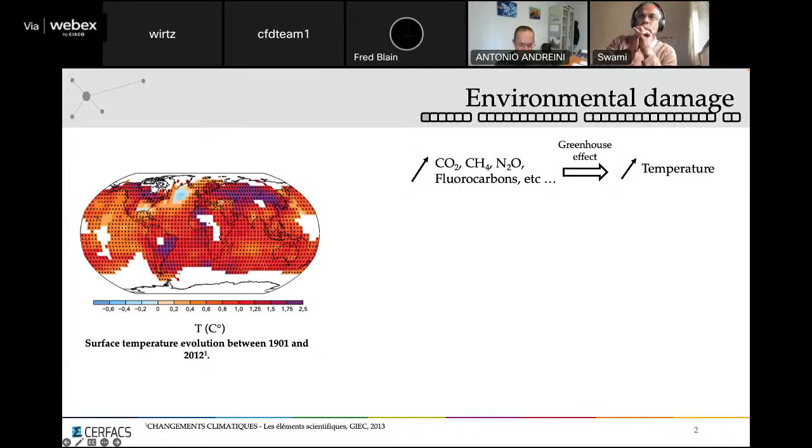First one on the environment, for example the seas are rising because the ice is melting, and there are longer heat waves. This also has consequences on human beings, that is to say populations are moving more, there are more water and food crises, and diseases are about to multiply.

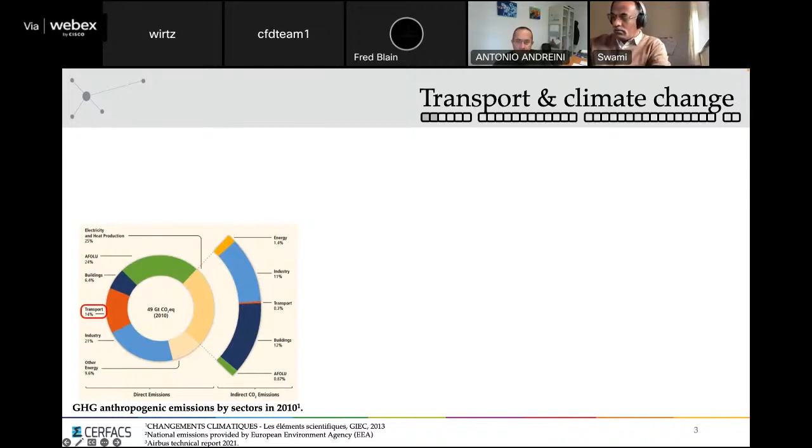Concerning the transportation sector, here is a graph concerning the anthropogenic emissions by sector. For the transportation sector, it's about 14%, mainly due to the combustion reaction with air of a hydrocarbon, giving carbon dioxide and water, which are greenhouse gases.

Among this transportation sector, we have civil aviation accounting for 13% of the total CO2 equivalent emissions, which represents 1.8% of the CO2 released.

But we also have to take into account other effects due to other pollutants, such as nitrogen oxides, carbon monoxides, soot, sulfur oxides, or unburned hydrocarbons, which account for a total of 3.5% of the total radiative forcing on the Earth.

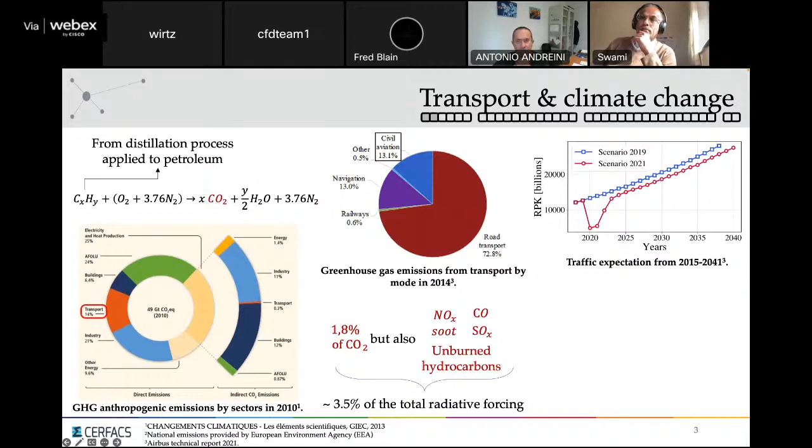This has to be put face to face with the traffic expectation that is expected to rise in coming years, as you can see on this graph representing the number of passengers for the years to come. Therefore, there is a need for improving our airplanes.

This is made by improving our power sources, which then must remain possible, safe, and sustainable, that is to say, to release less pollutant than fossil fuels.

We have three main strategies at our disposal. First would be the use of batteries. But as you can see on the graph on the left, representing volumetric energy density as a function of gravimetric energy density, batteries have one order of magnitude below the liquid fuels commonly used in aeronautical gas turbines, meaning we would have to carry 10 times the weight, which would not be suitable for aeronautical aviation.

Second, we could think about hydrogen, but the technology is not ready at the moment to put hydrogen in a current aeronautical gas turbine.

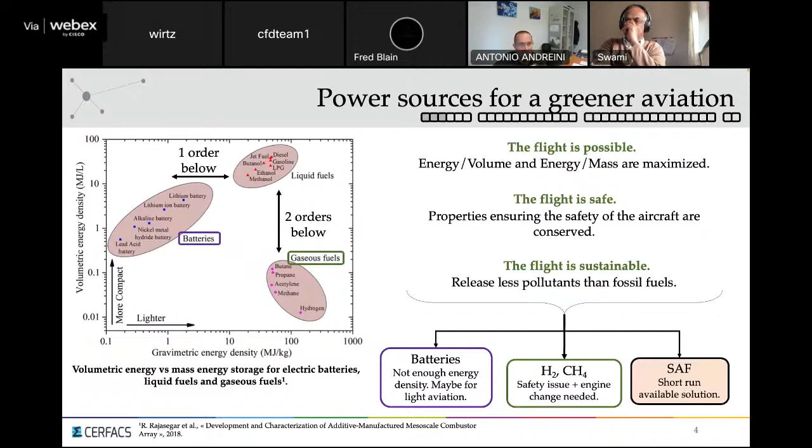Therefore, we will go to sustainable aviation fuel, or SAF, which is a short-run available solution that we could use at the moment. To define what is a sustainable aviation fuel, one must first define what is conventional kerosene.

Here you have the average formula, which is about 10 carbon and 20 hydrogen, but it's mainly made of different types of families, such as 60% of alkanes or branched alkanes, 20% of cyclic species, and 20% of aromatics.

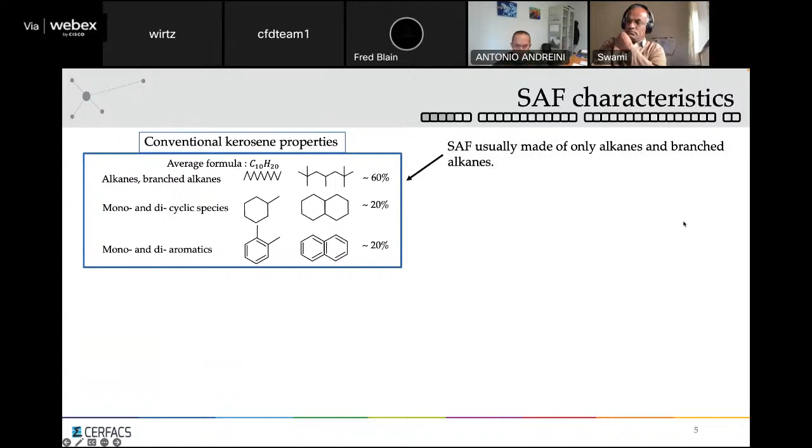Sustainable aviation fuels are usually made of alkanes and branched alkanes, so they will burn mostly the same way. But the idea here is that the feedstock grown to produce those sustainable aviation fuels has already taken part of the carbon dioxide, and then in the total life cycle, it will reduce the emissions that have been made.

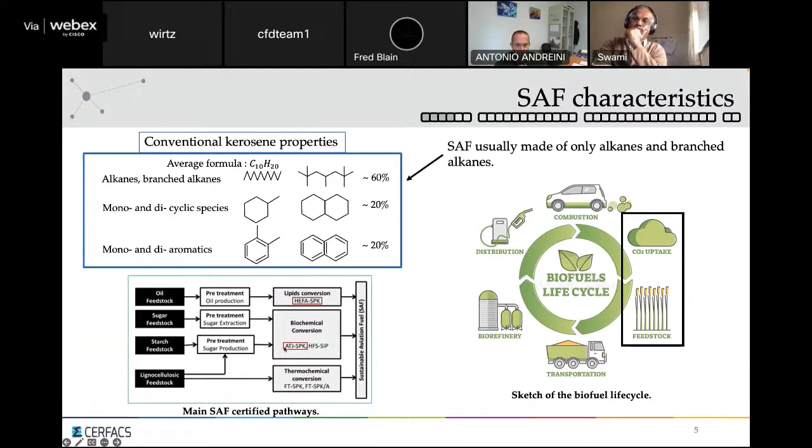There are several paths taken into account, and the most well-known are the one producing HEFA fuel from oil feedstock, and alcohol to jet fuel from sugar and starch feedstock.

This brings me to talk about the Jetscreen project that funded this thesis, whose goal was to create a fuel database based on a fuel matrix with given interesting properties, with experimental and numerical work from the industrial partners and laboratories that took part in this project, to study pollutant emissions, extinction, ignition, pumping systems, and every other system that could be thought of.

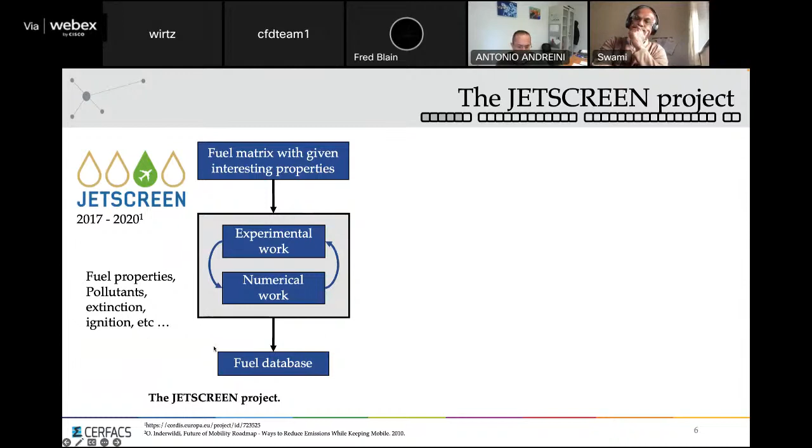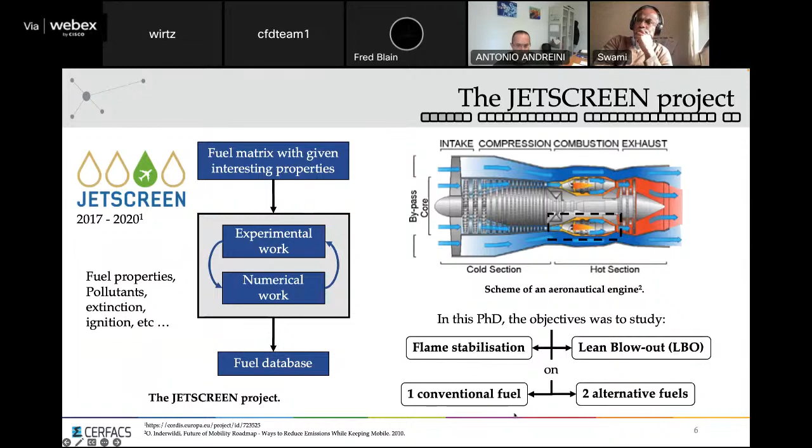If we come back to the combustion chamber, here is a sketch of it. We have primary air that is mixed with fuel through an atomizer, often pressure swirled, allowing for two different zones to be accounted for when the flame is stabilized: the outer recirculation zone and the inner recirculation zone over here.

Then droplets are injected into the combustion chamber in liquid form, and they evaporate before, in between, or after the flame front, giving high temperature. We then lose heat through the walls, the gases are cooled down by the air, and then released through this exhaust duct as burned gases.

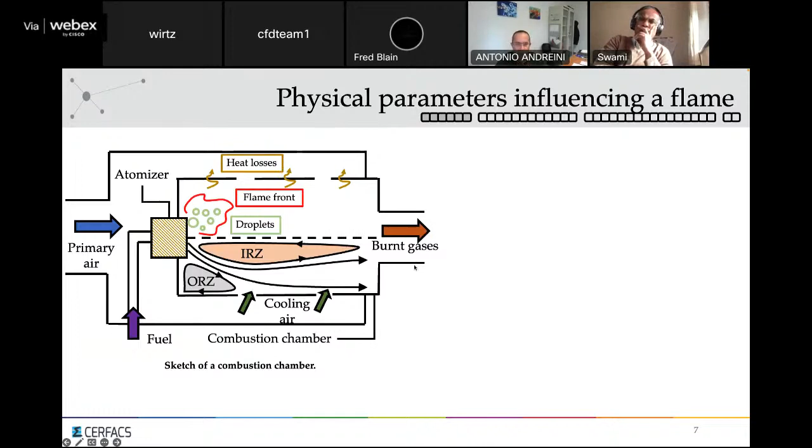This means we have several phenomena that we must account for: turbulence, for example, induced by the high motions of the combustion chamber; the spray, which is both a liquid and gaseous system; and the combustion, which relies on chemistry. For this we need to use large eddy simulation to account for all of that with a compressible multi-species code such as AVBP.

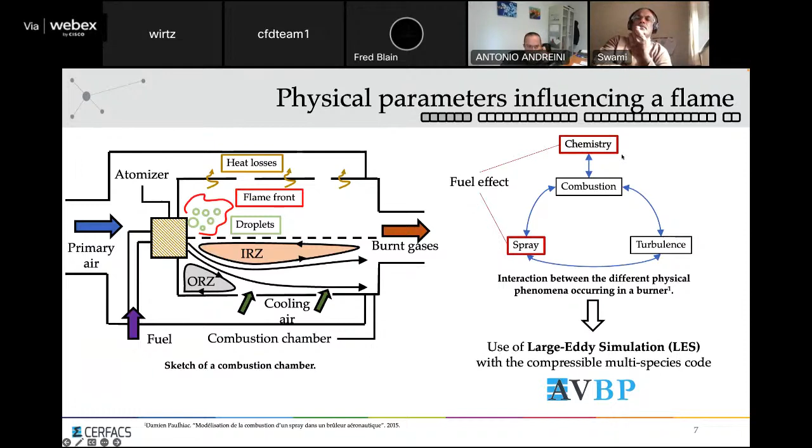This PhD's goal is to look at the fuel effect. Therefore, we will have to look at two main aspects of these sustainable aviation fuels: the chemistry and the spray. This brings us to the plan of the PhD.

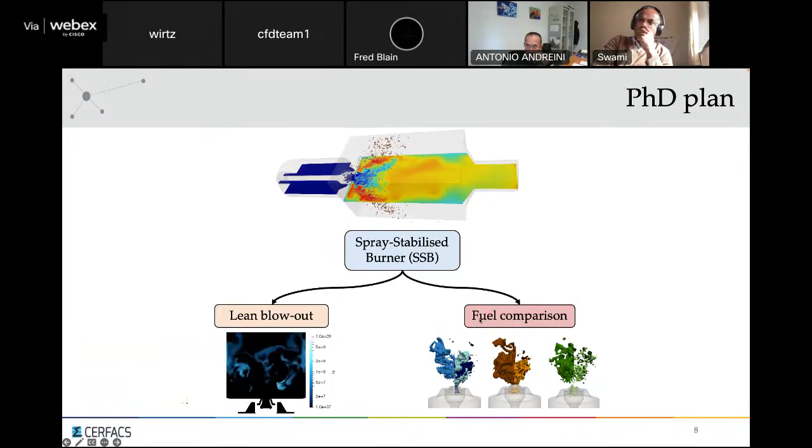First, after introducing the spray stabilized burner from DLR that was experimentally and numerically simulated, we will talk about the lean blowout. Then we will talk about fuel comparison between the one conventional fuel and the two alternative fuels. But first, we have to look at canonical processes concerning the chemistry and the two-phase flow.

So first, we are going to see the chemical canonical processes and go from the experiments to how we should model kinetics in our engine. And that's the data that we received from the experimentalists.

So it's a GCxGC matrix, and the idea is that it's a mass percentage of every species class per carbon number. Each bar here represents one species, and we can't afford to take all of these species in a multi-species code such as AVBP.

So therefore, we have to construct a multi-component surrogate model, and that's what Polimi did with this real fuel. They do that to emulate the properties of this real fuel.

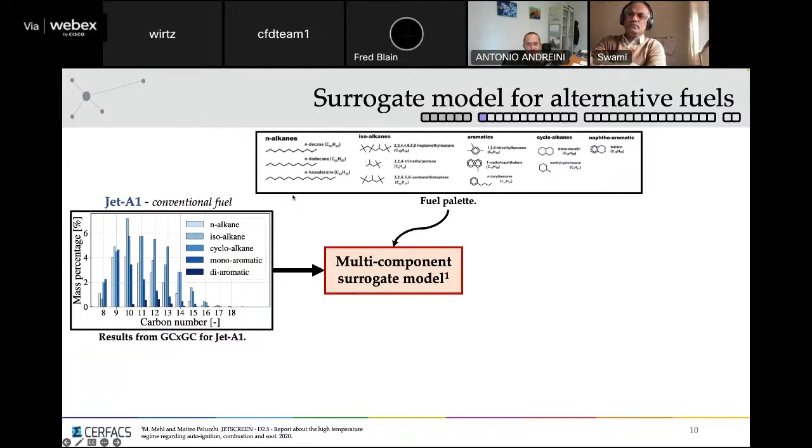So how do they do that? First, they pre-select a fuel palette with several species where they know the properties that they want them to emulate the real fuel. And they choose objective functions: chemical objective functions such as the H/C ratio and the composition, and physical properties such as the distillation curve, viscosity, or density, for example.

Then they arrive at a final surrogate definition, which here for Jet A1 considers n-dodecane at 60%, methylcyclohexane, which is a cyclic species, at 20%, and xylene, which is an aromatic species, at about 20%. Jet A1 in this defense will be used as a reference fuel and will always be displayed in blue in the following slides.

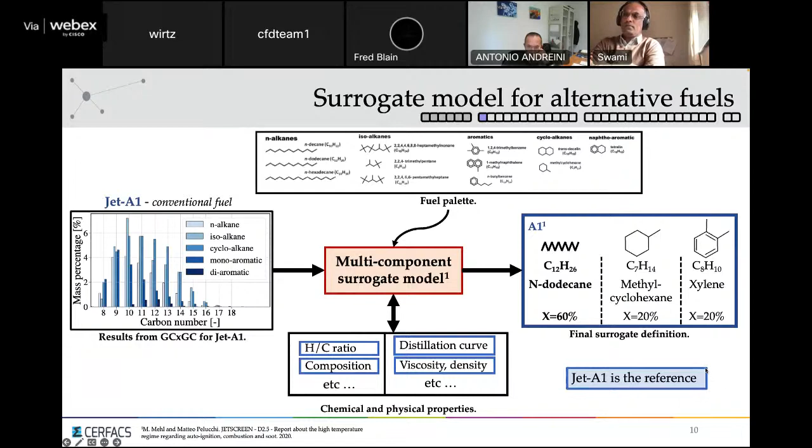For the two other alternative fuels that we are going to see, the first one is alcohol to jet fuel, which is composed of branched species, mainly isododecane, but also a little bit of isooctane and isocetane, and which will be displayed in red.

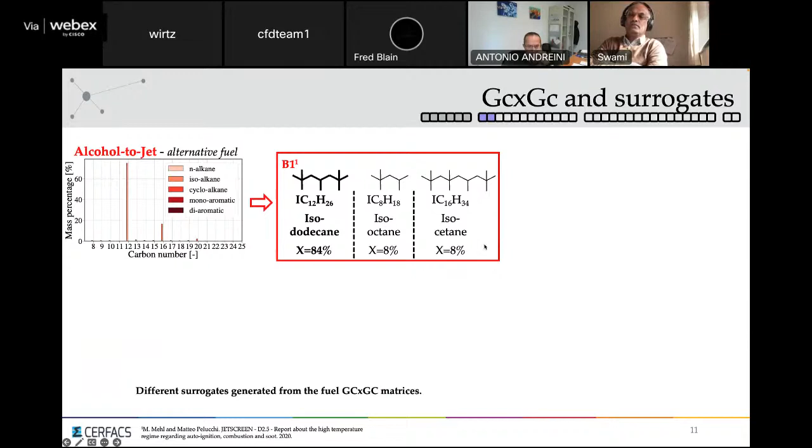Finally, there is a high aromatic fuel that was created for JETSCREEN to look at the influence of a lot of cyclic and aromatic species on a surrogate mechanism, and which is composed of a double cycle species, decalin, at about 60%, a branched species isododecane at about 20%, and a double aromatic methylnaphthalene at about 20%. It will always be displayed in green.

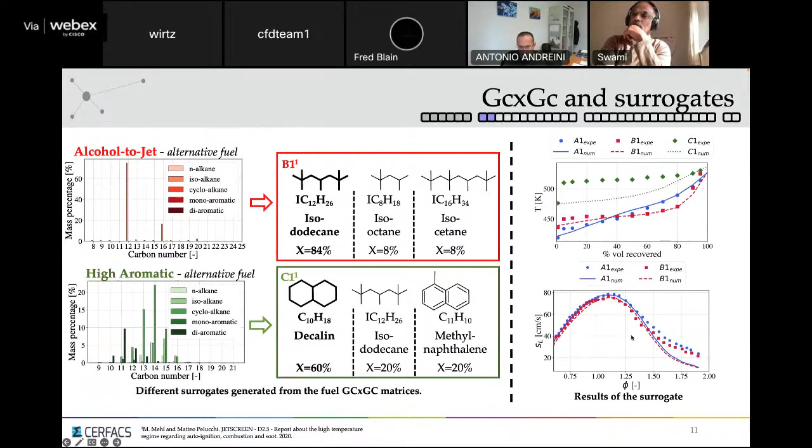If we look at the properties of those surrogates and how they compare to the real fuel, one can look at the distillation curve here and the laminar flame speed over here. There, one can see that between the blue and the red curve there is a good match, and the sensitivity is retrieved for both properties. However, for the green one, it's much further off for the distillation curve, and there were no data at the moment for the laminar flame speed. A second aspect to be taken into account is the reduction of the model.

This often goes through the fact that we receive a detailed kinetic mechanism from the experimentalists that simulates how reactants go to products with a lot of intermediate species. Usually these mechanisms for heavy fuels are above 100 species, which is not affordable for us again.

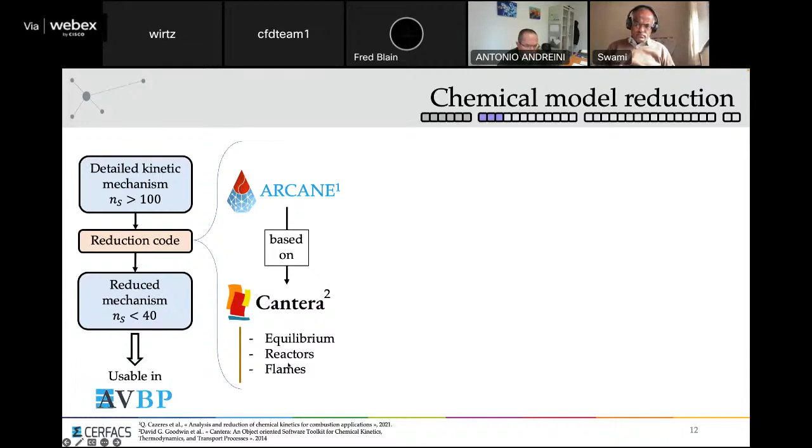So we have to use what is called a reduction code to be able to use a mechanism that contains less than 40 species and that are then usable in AVBP. Here at Cerfacs, we are using Arcane, which is an upper layer from Cantera, an open source kinetic solver that relies on equilibrium, time evolving reactors, and flames.

So how is Arcane working? Here we input to the code a mechanism, fuel, and operating conditions, as well as a target species and maximum acceptable errors that rely on the cases described here.

We will apply three techniques. First is species removal with a direct relation graph with error propagation, meaning representing the species and reactions and deleting the weakest species and reactions that don't contribute to the greatest path.

Second, we are going to lump the species, so if there are isomers, they can be lumped. After applying those two steps, we have a skeletal mechanism, but it is still too stiff temporally and still contains too many species to be used as such in AVBP.

Therefore, we apply a third technique, a quasi-steady state assumption, which relies on the fact that species react very fast, so we can approximate the source term such that an algebraic relation may be found to calculate the species. This means it's still contained in the mechanism, but not in the transported species, which reduces the number of species used in the scheme in AVBP.

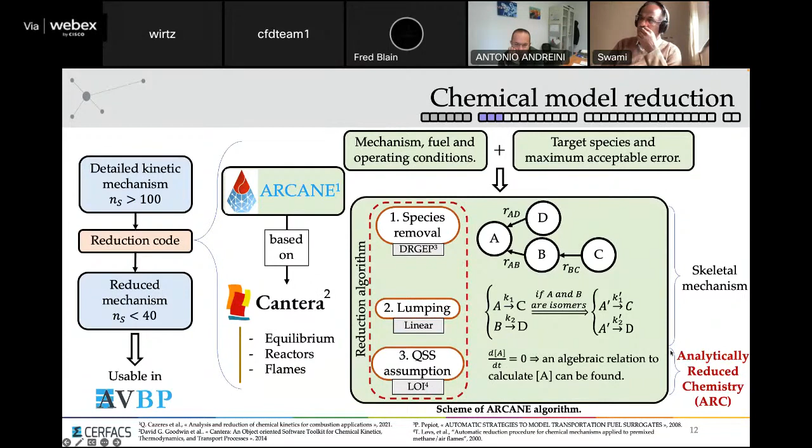This final scheme is called an analytically reduced chemistry, or ARC mechanism. So we are going to do that with the POLIMI mechanism, which contains 368 species and roughly 14,000 reactions.

We applied our reduction step to these cases: a time-evolving reactor with an ambient pressure, a stoichiometric equivalence ratio, and an auto-ignition time. We want the auto-ignition time to be below 15%.

For the premixed flame, we chose an initial temperature of 400 Kelvin, an ambient pressure, lean stoichiometric and rich equivalence ratios, and we want the laminar flame speed as well as the carbon monoxide final and maximum mass fraction to be below 7%, the final products to be below 2%, and the final temperature to be below 1%.

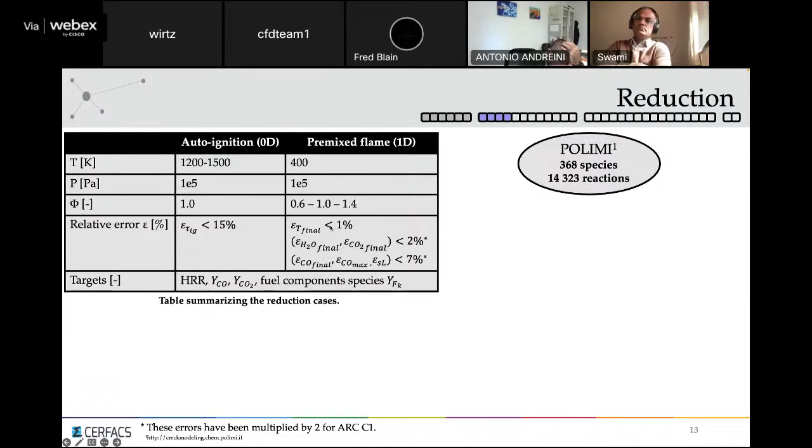We have to say that for C1, the errors have been multiplied by 2 to be able to reach this target error. So what we can look for then is what species are finally kept.

Here we have done this exercise for A1, where we have the fuel species dodecane, methyl cyclohexane, and xylene, the air, the main products CO, CO2, and water, other intermediate species, but most of the species in the mechanism are the decomposition species here.

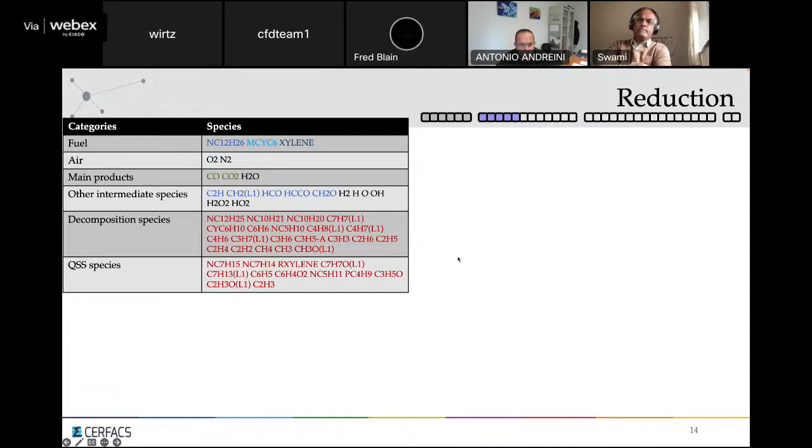If we represent the fuel pathway following the C atom, one can see several paths from the red species toward CO and CO2 and other species, and there are common pathways here for methyl cyclohexane and dodecane, for example.

The most important species are completely comprised in the dodecane mechanism, while for xylene it's much more reduced because it starts from a molecule with a different structure, meaning the more different the species, the more pyrolysis species there will be in the mechanism.

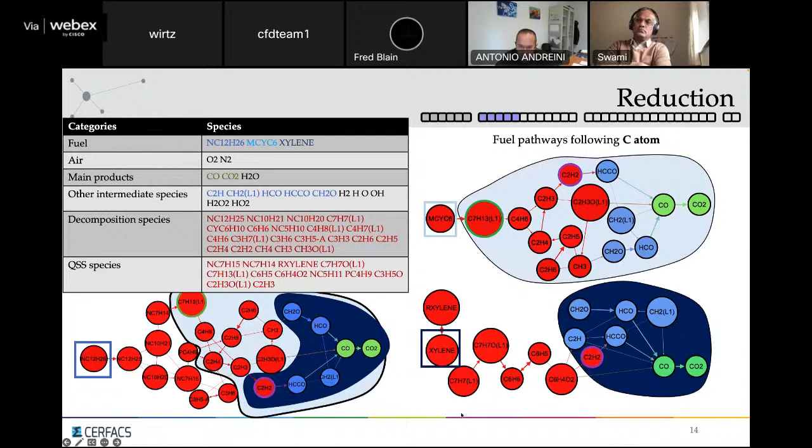This could also be lowered by using HyChem methodology and suppressing all these links by reaching only the species with small carbon counts. When looking at the results, one can look at the final state of our mechanisms through different equilibrium conditions.

Here we can clearly see that fuels are sensitive to the H over C ratio, which has been put in order of increasing value.

We can see clearly that the water content is increasing, while the temperature at the end of combustion is decreasing, and the carbon dioxide and carbon monoxide mass fractions are also decreasing, meaning that since C1 contains the most aromatics and cyclic species, it seems to have a lower combustion efficiency.

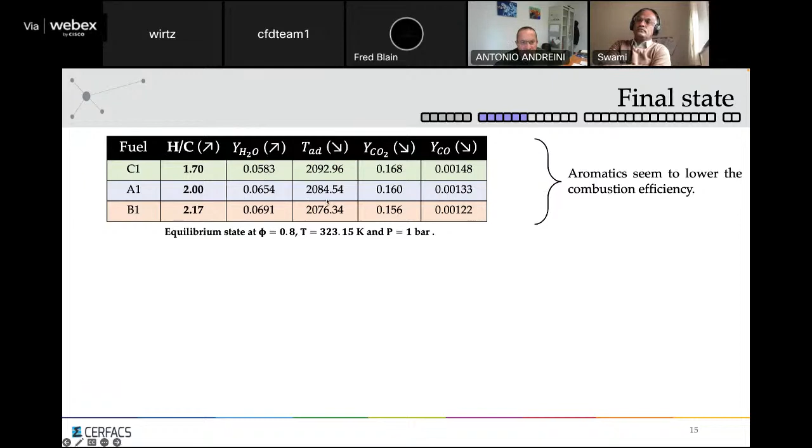So we have these fuel sensitivities, but one must not forget that there is also a sensitivity inside each fuel.

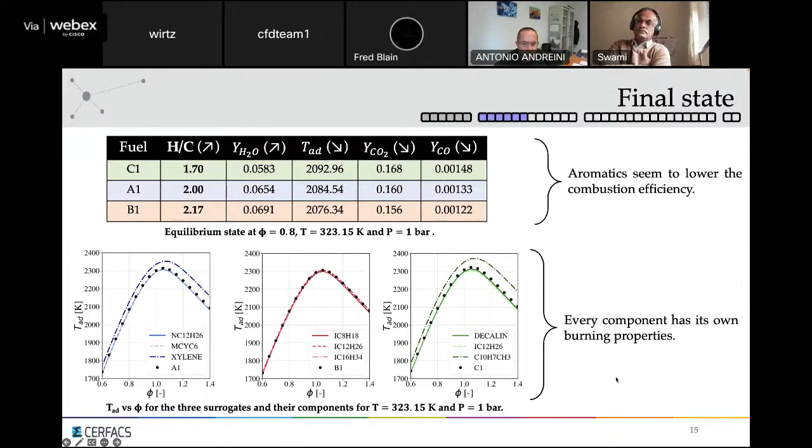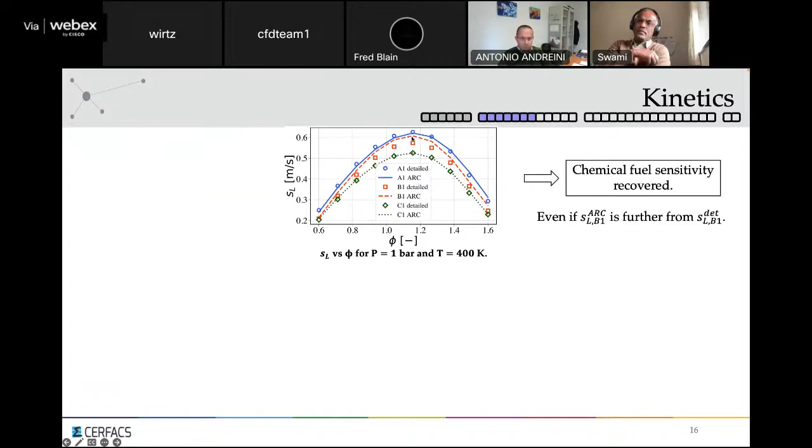Going to the kinetics, we can look at the laminar flame speed as a function of the equivalence ratio, displayed here for the three fuels compared to the detailed mechanism with symbols. One can see that the fuel sensitivity is recovered, even if for B1 the curve is slightly above the detailed mechanism curve, but still within the error targeted for ARC reduction.

We can go further by introducing the fuel effective ratio on a time-evolving reactor to understand the zones of influence of our fuel, introduced as the ratio between a fuel species equivalence ratio divided by the total equivalence ratio.

Here, for example, we start from n-dodecane being almost 60% of the total equivalence ratio, methyl cyclohexane being 20%, and xylene being 20%. You can see that n-dodecane, while being the majority species, is very quickly consumed before the cyclic species, and then before the xylene, the aromatic species, which takes much longer to decompose.

Here for B1, we can see they are all branched species, therefore much faster consumed. For C1, we retrieve the same conclusion: the branched species are consumed much faster compared to the cyclic and aromatic species.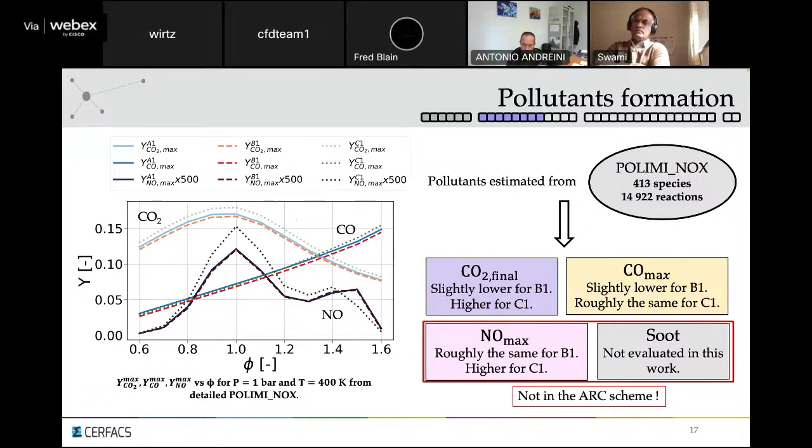Now that we've seen the chemical processes, we can go to the two-phase processes, seeing how from the models and vaporization properties we can move to spray flames to test these two-phase processes.

First of all, there are two modeling approaches in the literature. The first is discrete modeling, where every species, represented here with a bar, is evaporated - which may be costly but is simpler to code and better suited for fuels containing fewer species, like B1. There is also the continuous model, which relies on probability density functions and checks the species compared to their molar mass to evaporate them.

This representation enables representing a lot of species with very little computational effort. However, the coupling with the gaseous phase may be more tedious, as the gaseous phase cannot represent such a number of species. Therefore, the discrete model was chosen for this study.

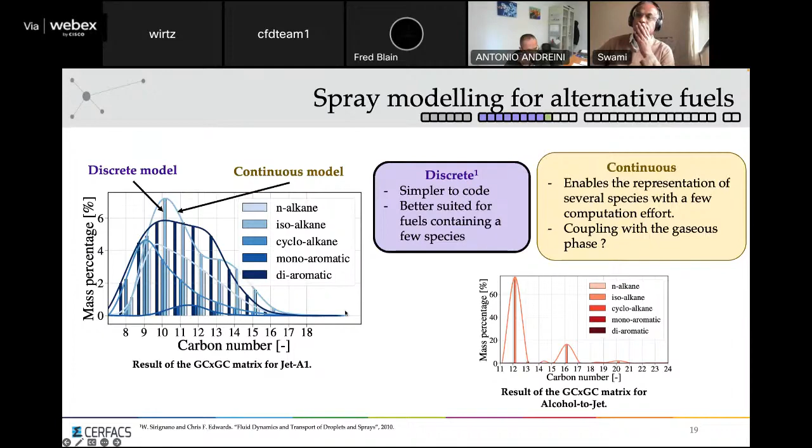To look at the performance of this model, we look at the diameter squared evolution of a single droplet evaporation, compared to an experiment made at DLR.

Here we can see the diameter evolving as a function of time for the experimental work, shown with symbols, and for the numerical work, shown as a line. One can see that the final evaporation time is retrieved for both, as well as the fuel sensitivity, meaning that A1 and C1 evaporate much longer than B1 does.

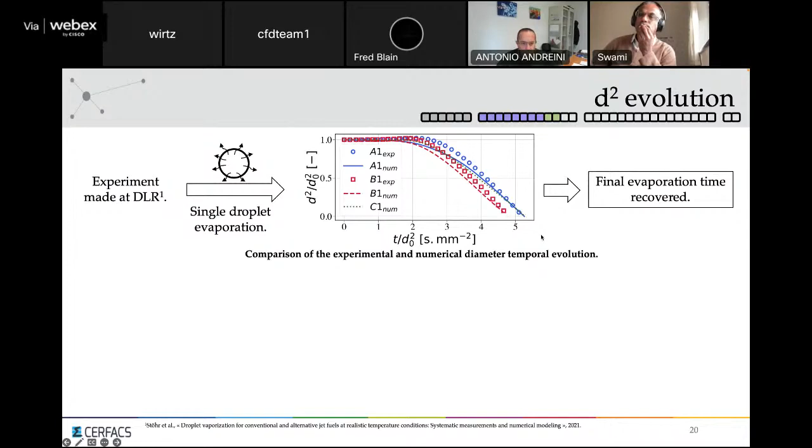There is also a sensitivity to each fuel species when looking at the liquid mass fraction inside every droplet. For A1, for example, methyl cyclohexane is the first to evaporate, followed by xylene, and then last is n-dodecane - meaning there is a preferential evaporation occurring between the fuel species present in our droplets.

For B1, we have isooctane evaporating first, then isocetane, which is the last one to stay. Then for C1, we have isododecane and decalin evaporating at approximately the same time, with methyl naphthalene being the last one to evaporate.

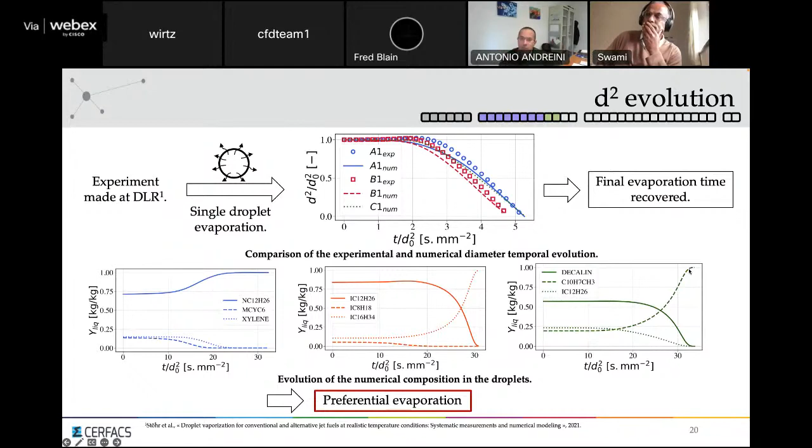This single droplet evaporation study enables us to move toward a more complex case that also involves chemistry, which would be a 1D spray flame.

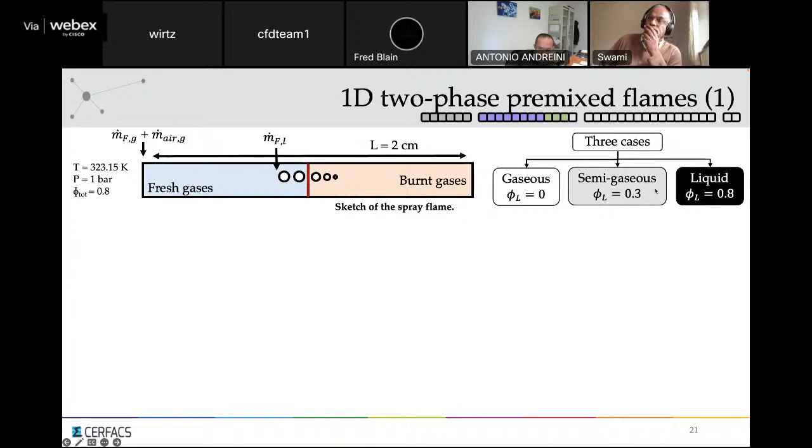Here is the setup of this spray flame where we fixed these parameters: a temperature of 50 degrees, ambient pressure, and a total equivalence ratio of 0.8. The idea was to inject part of this total equivalence ratio through gas or through liquid, with three cases: the first totally gaseous, the second semi-gaseous at approximately a liquid equivalence ratio of 0.3, and the last totally liquid equivalence ratio.

What we can see first is to retrieve our ratio, comparing our fuel species equivalence ratio to the total one, to see the zones of influence. One can see that it has completely reversed the order that we had for the gaseous flame. Here, xylene was the last one to be consumed.

However, for the other cases, as we evaporate dodecane last, it will be the last one to be consumed. It's almost the same conclusion for B1, where it's completely reversed, but it will have a lower impact since isododecane is the fuel with the most concentration in the original fuel. For C1, the order remains the same.

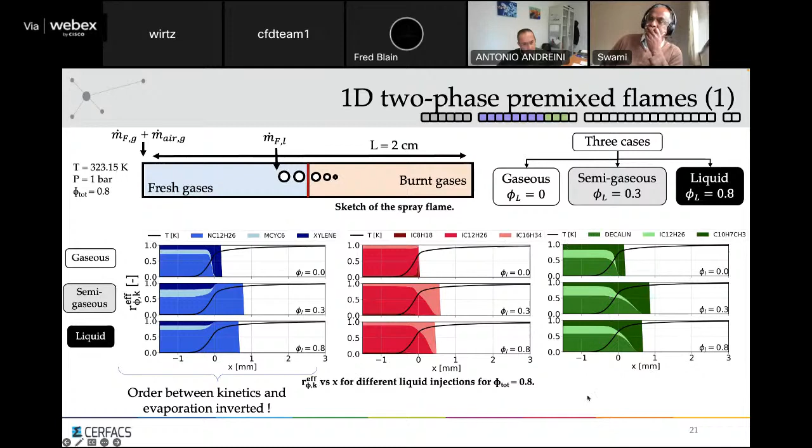This will change the properties of the flame, and we can look at how it changed, for example, the laminar flame speed here. It's already very tedious to calculate it when going towards more liquid equivalence ratio, as it's different from the purely gaseous one.

You can see that the preferential evaporation case here will not have the same impact on how the laminar flame speed is evolving.

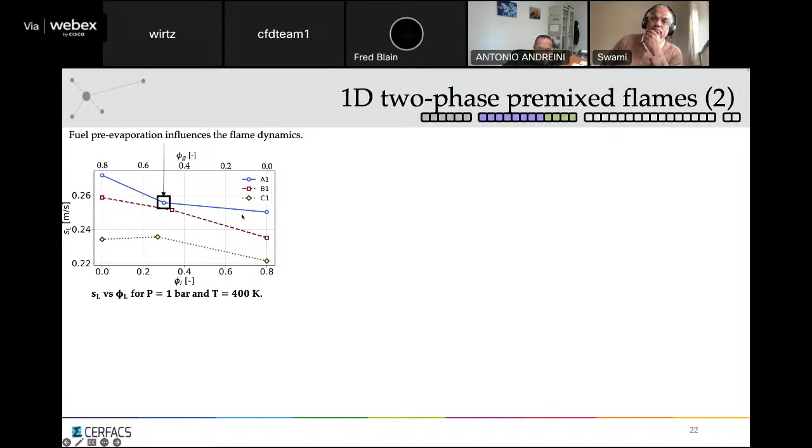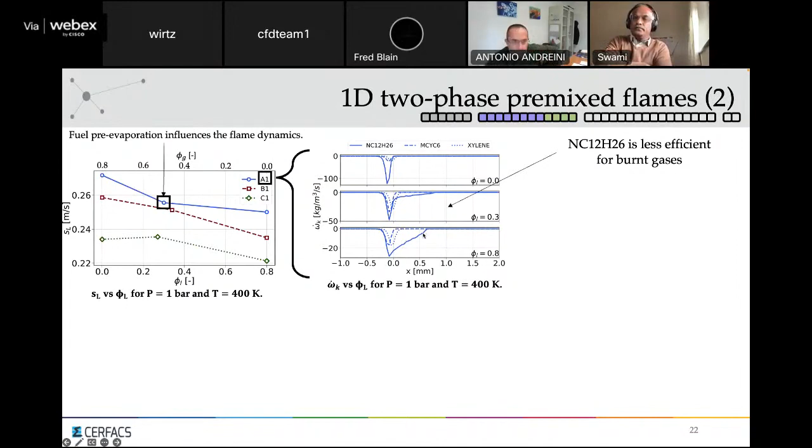For example, if we take the case of A1, we can clearly see that the fact that it's lowering the laminar flame speed is because dodecane will burn in hot gases, which will be less efficient than if we burned a purely gaseous flame, and this will change the dynamic of the flame.

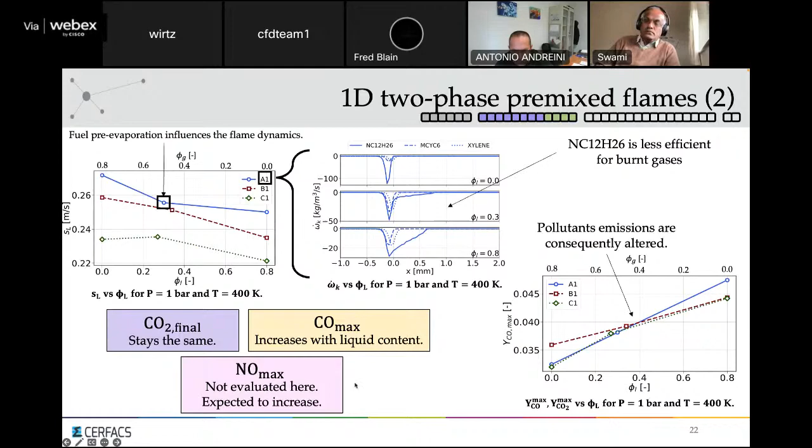So once we've seen both cases, the chemical processes and the two-phase processes, we can go to the burner and present how it was developed, from its presentation with the experimental work to the flame structure.

Here is the SSB burner from the DLR, where they computed it experimentally. The fuel is injected here, the air is injected here, and goes into the swirler, which is composed of two stages. A first stage atomizes the droplets coming from the injection tube, which then film on the boundary and are atomized again here in the second stage of atomization. Then the gas is released in the outer duct here.

The operating point chosen was a gaseous temperature of 50 degrees, a fuel temperature of 30 degrees, ambient pressure, and a lean equivalence ratio of 0.8. This point was chosen because there were numerous experimental data on jet A1, and a few on alcohol-to-jet, as we will see further on.

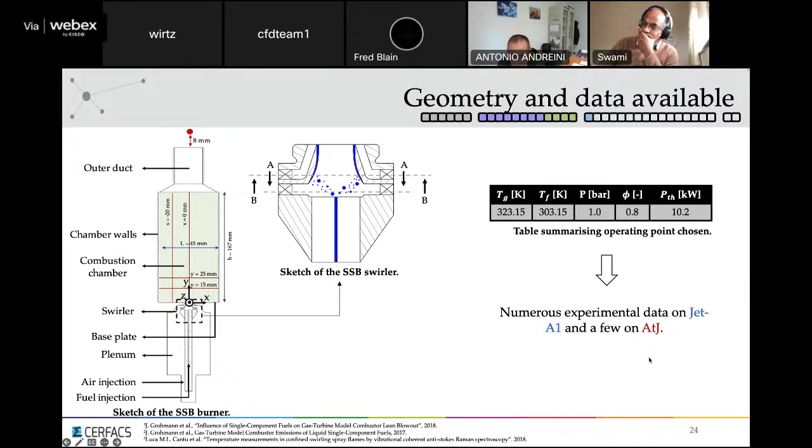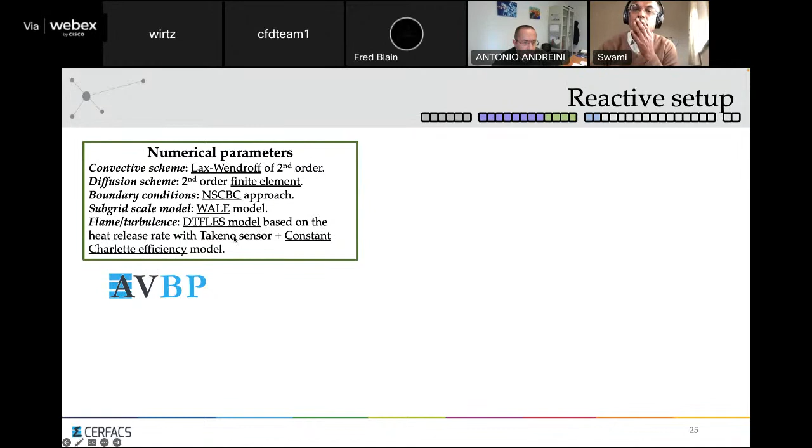We computed this chamber with AVBP. We applied a convective scheme using Lax-Wendroff of second order, a diffusion scheme that is second order finite element, an NSCBC boundary condition model, the WALE model for the subgrid scale, and a thickened flame turbulence model based on the heat release rate with a Takeno sensor and a constant Charlette efficiency model. Concerning the walls, isothermal walls with relaxed coefficients were applied on the combustion chamber and on the base plate.

All other walls were considered adiabatic, and the droplets are filming on the swirler walls and slipping on every other wall. For the chemistries, we used a BFER mechanism containing 6 species and 2 reactions, which emulates the properties of kerosene, such as the laminar flame speed, auto-ignition time, final temperature, and produced mass fractions.

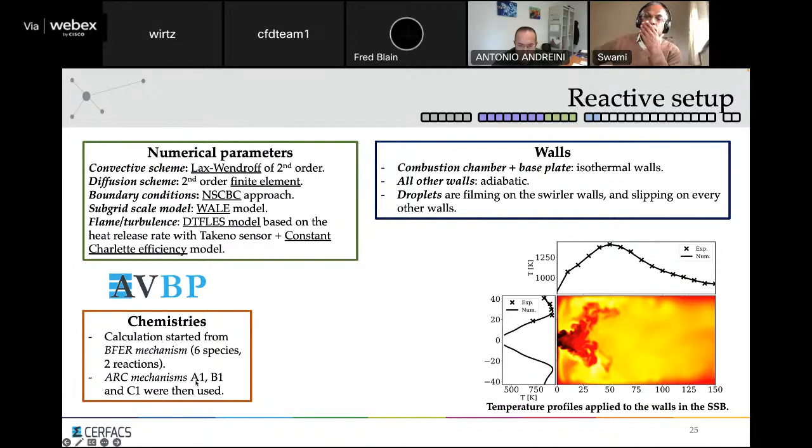From these calculations, we started the 3 ARC calculations, A1, B1, and C1. Finally, the two-phase flow was started with an Euler-Lagrange methodology with an evaporation model from Abramzon and Sirignano, a drag model from Schiller and Naumann, and a discrete multi-component approach, as said earlier. The injection was realized with a FIM-UR model with a Rosin-Rammler injection, determined with an optimization study.

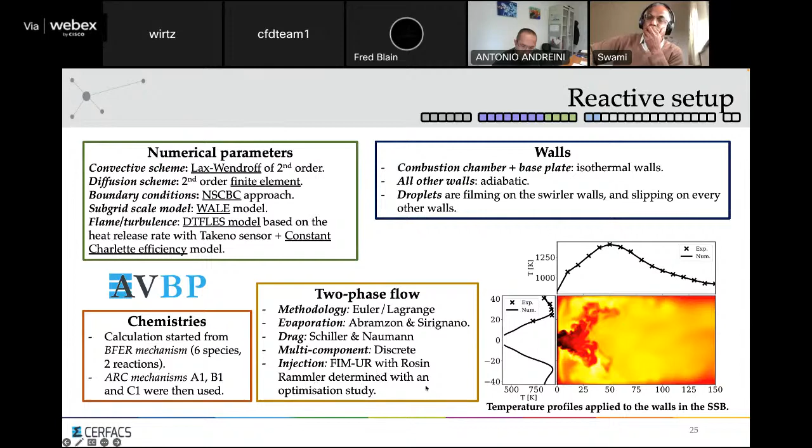Here is the structure of the flame we obtained, where we can clearly see the axial velocity field with the outer recirculation zone and the inner recirculation zone. The convective time step is about 5 milliseconds, which will be useful for the following discussion.

This induces the following shape of the flame. Here we have represented the positive heat release rate field on a logarithmic scale. One can see high activity in the outer recirculation zone and a little on the walls, and that the flame is M-shaped with a weak central branch.

This leads to the following temperature field, where we have high activity in the outer recirculation zone, which is then re-injected into the flame by the IRZ and ORZ, at the top and foot of the flame respectively, to reheat the flame.

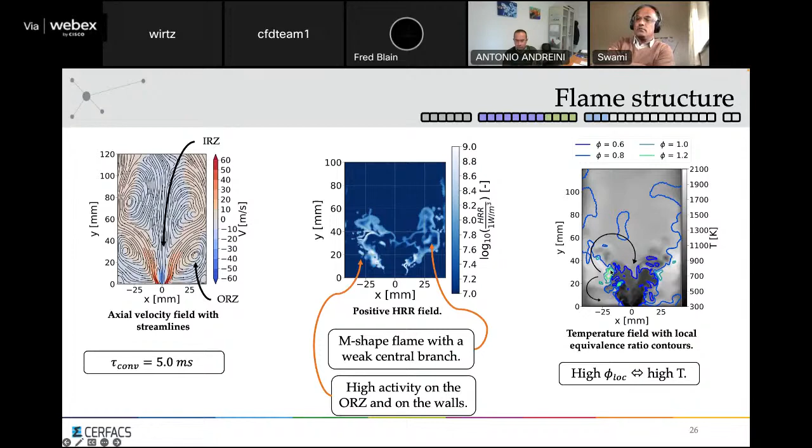We also performed contours of equivalence ratio, seeing that the flame is richer where the temperature seems higher. So, having presented the flame structure of the setup, we can now move to the lean blowout phenomenon.

First, we present the experimental procedure realized at the DLR. They started from a stabilized flame and decreased the mass flow rate by steps to reach 80 grams per hour above the expected lean blowout mass flow rate.

Then they performed a ramp at a steady rate lasting about 200 seconds to reach the LBO, and reproduced the results 3 times, obtaining the following results: the lean blowout equivalence ratio as a function of the air mass flow rate.

What we can learn from these curves is that alcohol-to-jet fuel seems to resist less than Jet A1 and high-aromatic fuel.

We are going to focus on this operating point, which shows an equivalence ratio at LBO of 0.49.

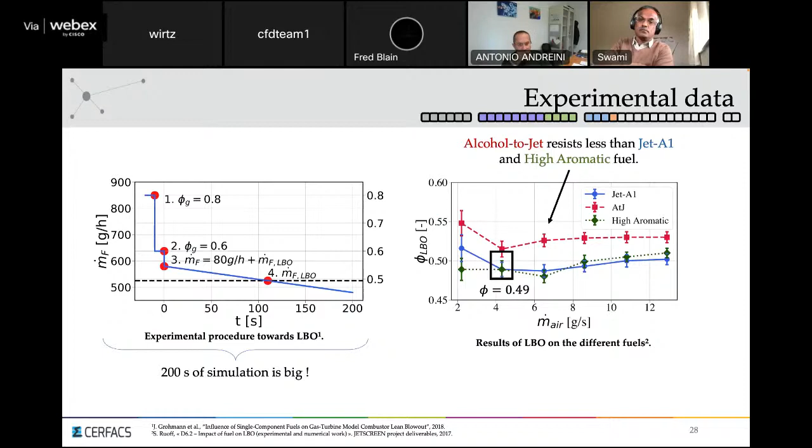However, simulating 200 seconds is very expensive computationally, so we apply another methodology based on approximations. This is what we want to present here.

However, we are not sure the value we get numerically will match the experimental one, so we go through different steps to see where our numerical value lies.

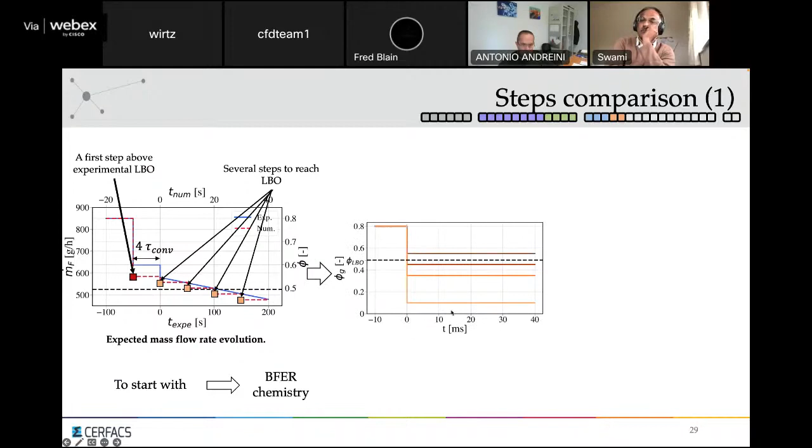Here are the results for the temperature field. The cases under the threshold are almost extinct, and the cases above almost continue to ignite the flame, meaning the lean blowout limit would be computed between specific bounds.

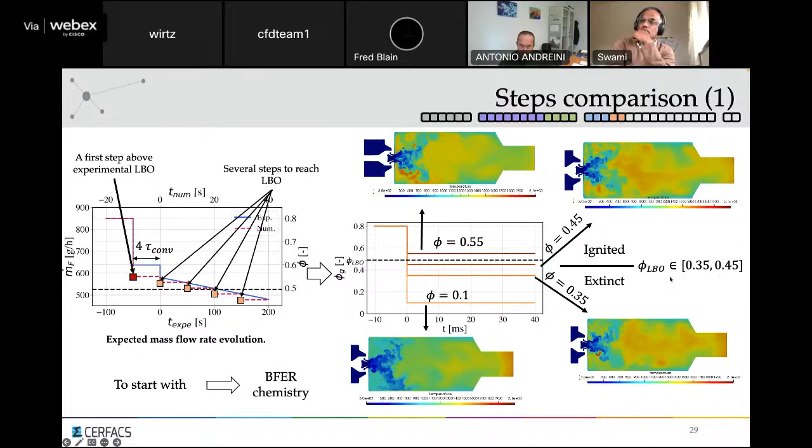Specifically, the limit would be between 0.35 and 0.45. To look further, we examine different interesting variables that can be computed.

Here we have maximum variables, such as maximum temperature and maximum heat release, and mean variables taken over this box to avoid effects from the burnt gases. What we see first is that for the maximum variables, there is an abrupt change for the extinct cases compared to the cases still ignited.

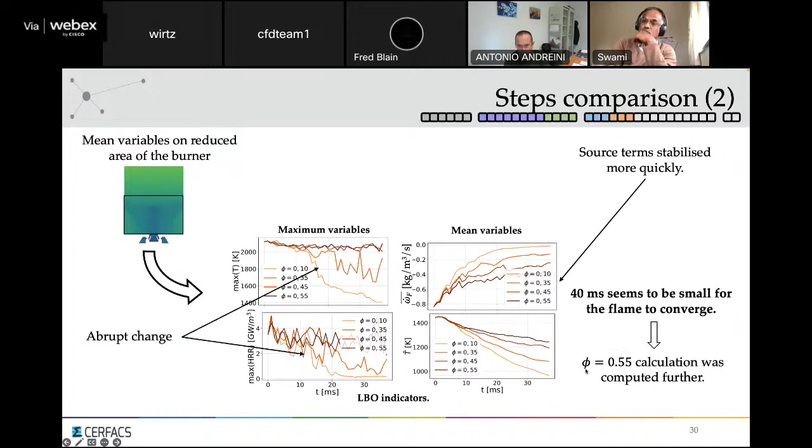So here 0.45 and 55, which are the darkest color, and lighter color for the other fuel. For the mean variables, you can see that source terms seem to stabilize very quickly compared to the mean temperature field, which seems to be continuing to decrease, meaning that 40 milliseconds is too small for the flame to converge. Therefore this calculation will be computed further.

So here we have put some different fields concerning the near blowout flame: the fuel mass fraction, and here the heat release rate with the logarithm scale with control of thickening. What one can see is that the pre-evaporation is longer, and there is less heat released and more thickening here because we are reaching a coarsened area of the flame.

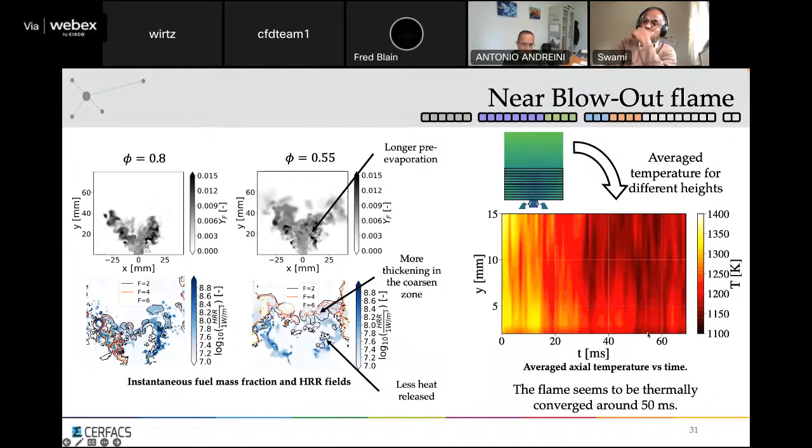Finally, we have averaged the temperature for different heights here for different boxes through time. What we can see is that the flames seem to thermally converge around 50 to 60 milliseconds. So we can wonder why this time is so long to converge.

Therefore, we have looked at the different timescales with respect to what could occur with lean blowout. Here we have the flow timescales above and the reactive timescales under. Looking first at the reactive timescales, it seems the autoignition and chemical timescales have small influence because they are very fast, and it's the evaporation timescale which really monitors the flame. Whereas for the flow timescale, we have represented the swirl timescale based on one round of a particle, a convective timescale, and the outer and inner recirculation zone timescales.

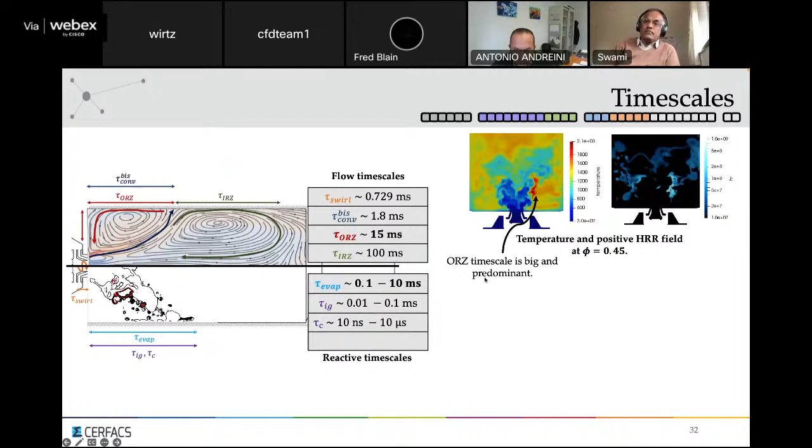What you can see on those two movies is that the zone of high temperature is where the droplets will be ignited. Therefore, it's really the outer recirculation zone that has a big timescale and will monitor how the flame extinguishes, with two-phase flow delay that will delay the extinction, which explains why it takes such a long time.

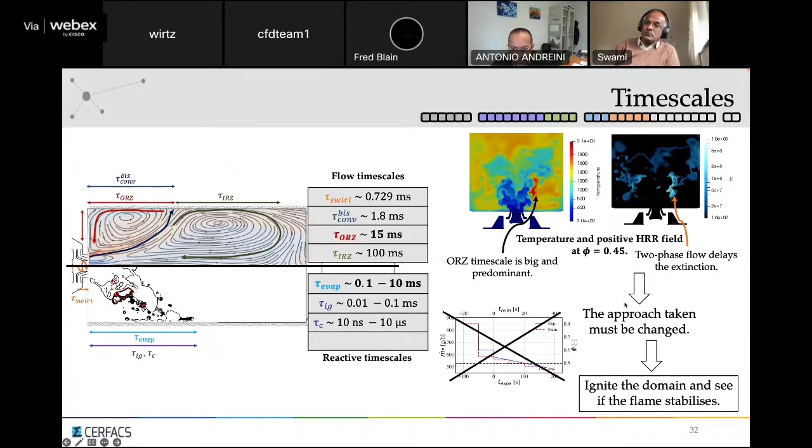Therefore, we cannot apply the approach we wanted to take at the beginning, and we must change. What we decided is to ignite the domain at different fuel mass flow rates, and then see if the flame would stabilize or not. That's what we did for two cases, with a flame at an equivalence ratio of 0.40 and another one at 0.45, where here the flame seems to extinguish, while here it seems to be sustained.

That's what we can see on the different variables: here the mean heat release rate, and here the maximum temperature, which seem to be sustained for phi equals 0.45, while it seems to extinguish for the other one. However, going further in the computation, it seems this case is also extinct, which testifies to the difficulty of capturing lean blowout for two-phase processes.

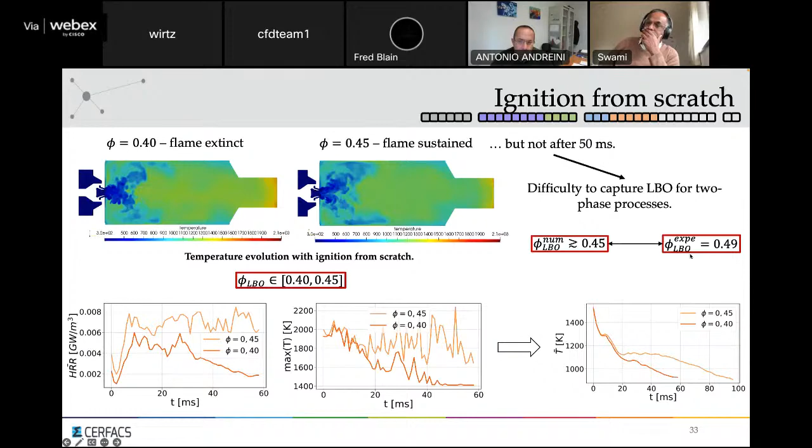Finally, the LBO limit was found to be roughly above or at the same level as 0.45, which is almost the same, not that far from the experimental LBO. So now that we've gone through the lean blowout, we can go to the comparison of the different fuels.

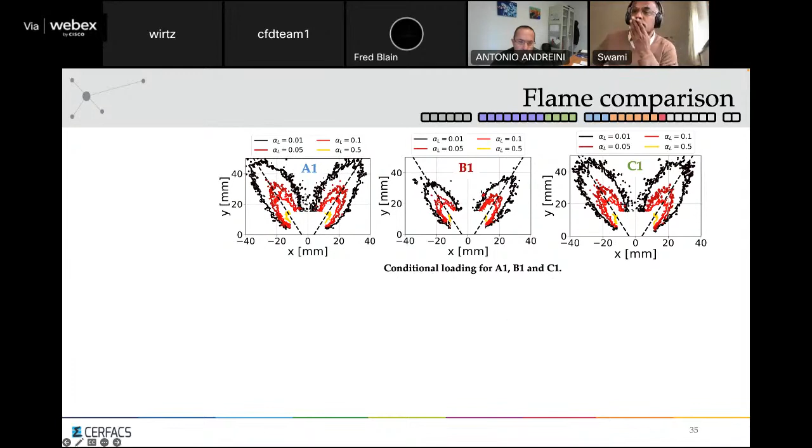First of all, we can compare them to the conditional loading, meaning the probability of finding a droplet in a located area between A1, B1, and C1. One can clearly see that B1, as said before, will evaporate sooner than the two other fuels.

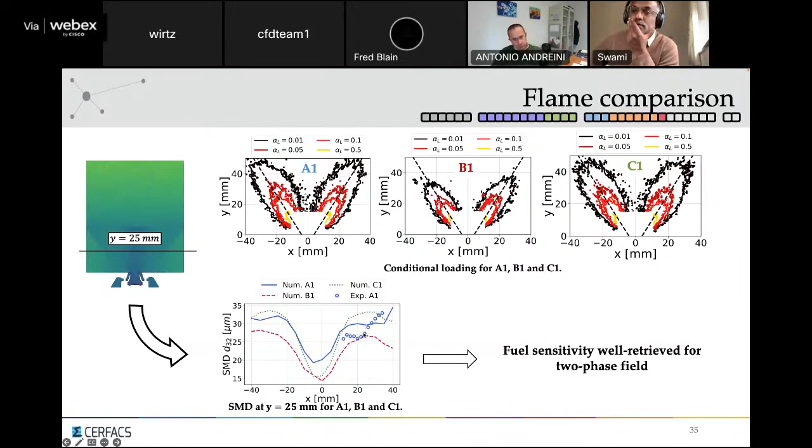That's also tested here when we look at this line 25 millimeters above the injector, where you can see that the Sauter mean diameter is higher for A1 and C1 than for B1, meaning the fuel sensitivity is retrieved from the canonical cases. Here you can also see symbols representing the experimental value, showing that we are not far from it.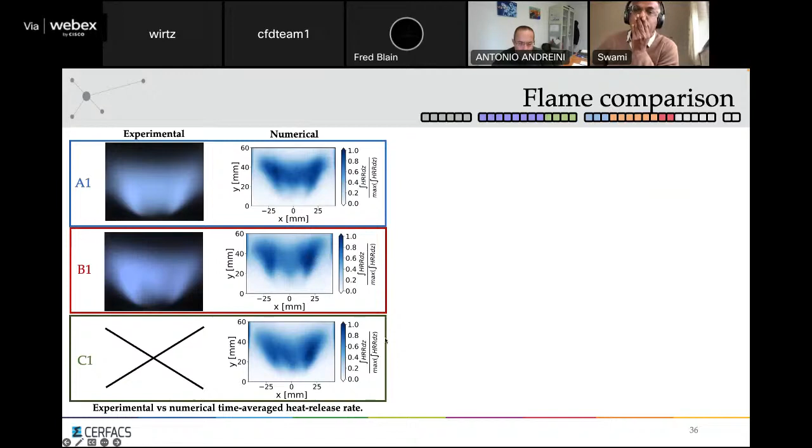When we look at the average heat release rate line, comparing the experimental A1 curve to the numerical A1, we see that the flame is shifted toward burnt gases. Between A1 and B1 experimentally, B1 seems shifted toward burnt gases compared to A1, which is retrieved numerically with a lower extent. C1's heat release rate seems thicker than the other fuels, but located roughly where A1 is.

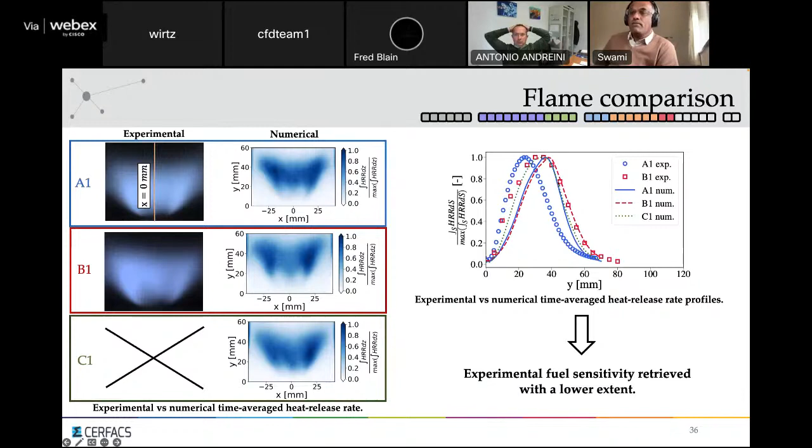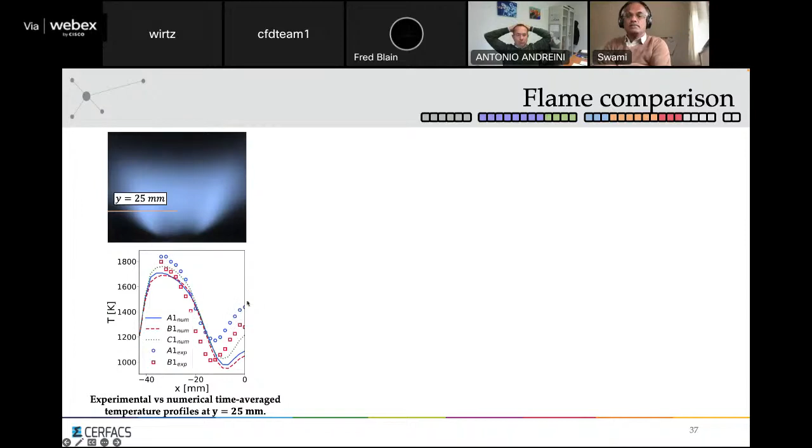Looking at the temperature radially averaged profiles, compared to the experimental value we are underestimating them a little. But here B1 has a lower temperature than A1, which has been retrieved numerically also with a lower extent. And if we look at the average temperature lines over this line, we also retrieve this behavior, with C1 being a little higher than the other fuels.

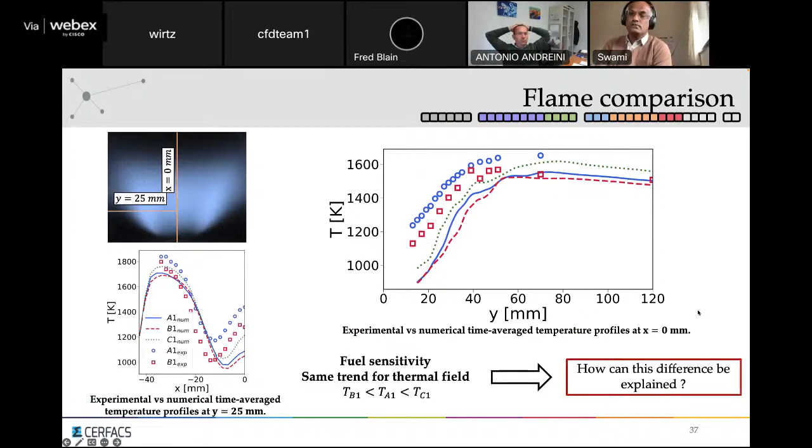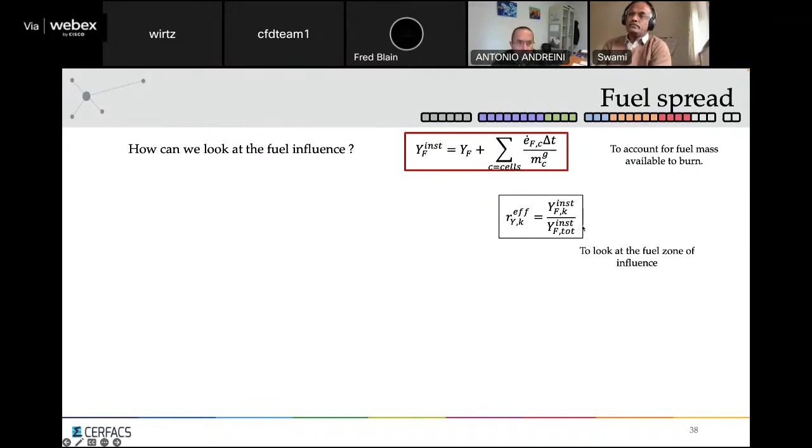Now we have to explain where this difference comes from. To do that, we introduce the instantaneous fuel mass fraction variable, which accounts for the fuel mass fraction and the mass still available to burn. We can then construct a ratio comparing the fuel species' instantaneous mass fraction to the total one, to look at the different zones of influence. That's what we can see here.

So here you have a Maxwell triangle representing the different zones of influence. You can see that for B1 it's quasi-monofuel, as we already said, with isododecane being nearly the only fuel to dominate the flame.

For A1 and C1, it's much more stratified: methylcyclohexane burns first because it's the first to evaporate, then progressively replaced by xylene, and by dodecane burning in the outer recirculation zone. For C1, isododecane burns first and is progressively replaced by decalin, which is the dominant fuel in the initial composition.

Then at some points it's replaced by methyl naphthalene, with other points still showing decalin, monitoring the two-phase flow field. This means we can see with this representation the influence of the spray, with some polydisperse effects highlighted that were not present in the 1D spray flame.

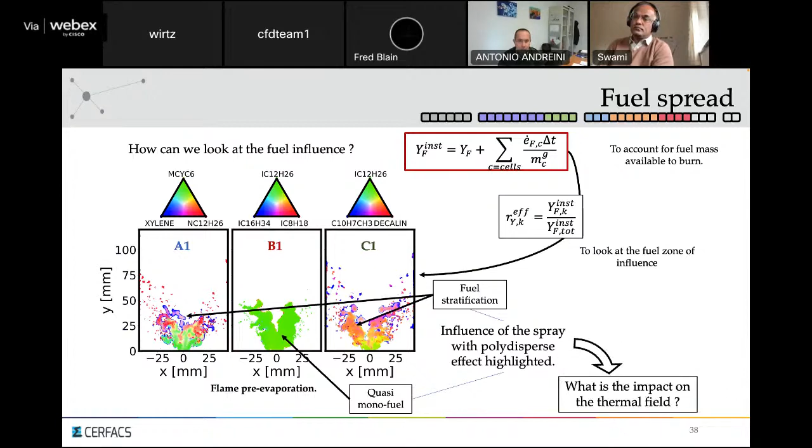The question is, how does it impact the thermal field? To look at that, we introduce a new tool: these triangle plots. For example, on the square here we have the initial composition in mass fractions: roughly 71% of dodecane, 15% of xylene, and 14% of methylcyclohexane.

This represents a scatter plot with a probability density showing where the points are most likely located in the burner. You can see that for A1, it's much further from the initial composition and very widespread across the triangle.

Here is the same plot, but with points featuring temperature. The more yellow it is, the higher the temperature, and the more black it is, the lower the temperature. We can relate that to the previous graph: for example, methylcyclohexane dominates the root of the flame, which is cold.

Here, xylene burns as monofuel on the edges at high temperature. And finally, there are zones where droplets seem to be burning in the far field, represented by this line, accounted for by the instantaneous mass fraction field I introduced earlier.

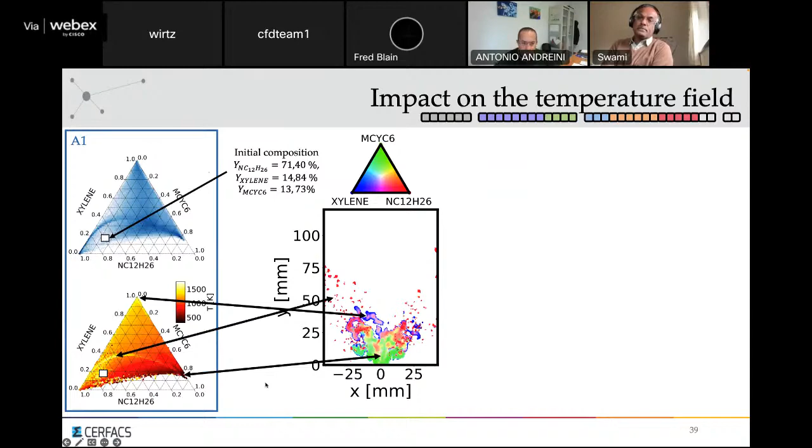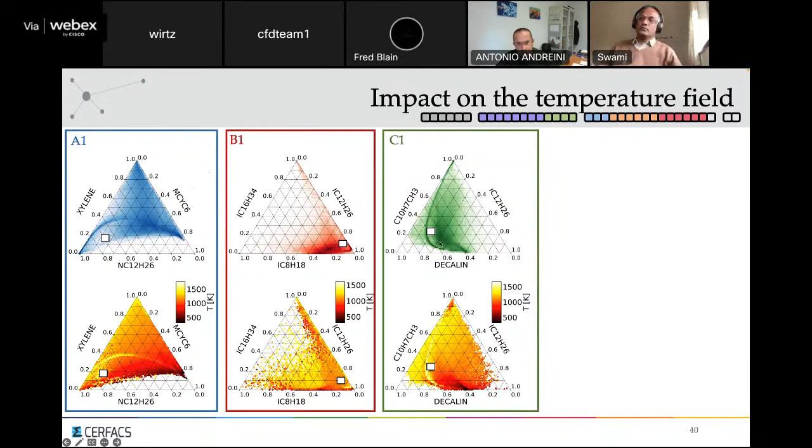Looking at the other fuels, for B1 the consequences are roughly the same as we said before—the composition is very close to the initial one. For C1, the composition is also very close to the initial one, because there is no reversed order between evaporation and kinetics as there is for A1. You can also see this line here, which is at higher temperature and represents the two-phase flow burning.

So if we sum up what we just saw, we have two-phase flow effects that are influencing the chemistry, where the chemistry will be affected by a pre-evaporation effect and by a preferential evaporation effect. And this chemical effect will apply heat release differently, being kinetically more quick or not in some location, which influences the thermal effect of the flame.

Those effects were already seen on the 1D spray flame, but not the polydispersity and thermal losses effects. The thermal losses induce a lower gas temperature, and therefore droplets burning in the far field may induce a surplus of temperature that may increase the global temperature of the burner for A1 and C1.

Finally, when looking further at the flame, one must look at the combustion regime, tackled here by the Takeno index, chosen to be the sum of the fuel species and pyrolysis products, to account for the area where a lot of chemical activity is occurring without it necessarily being the fuel itself, as the fuel may have pyrolyzed in some cases.

Here you can see a premixed flame represented in white, a diffusion flame represented as the darkest zone, and the stoichiometric equivalence ratio displayed as a red contour for A1, B1, and C1. As one can see, A1 and C1 seem to have a much more extended diffusion zone than B1, especially because of two-phase flow burning.

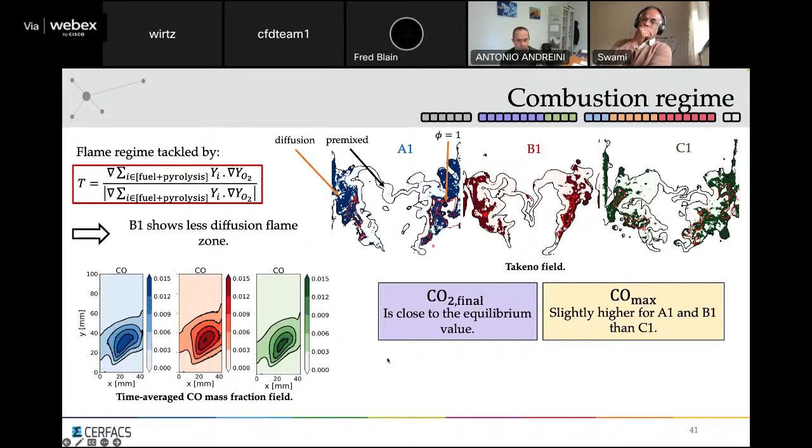But B1 has a smaller diffusion zone and reaches further for the real diffusion flame, which influences the pollutant emissions, where surprisingly A1 and B1 seem to have roughly the same order of pollutant emitted compared to C1, which is a bit contrary to what we saw on the chemical effects.

The final CO2 mass fraction is found to be really close to the equilibrium value and is not represented here. For the maximum NOx mass fraction, it was not evaluated here, but it would be expected to rise for A1 and B1 flames as the temperature is higher for those two cases, thus increasing NOx values. To conclude, this PhD has enabled the development of practical guidelines for the sustainable aviation fuel definition with three main principles.

The first would be that the H/C ratio should always be maximized to be as chemically efficient as possible, meaning there should be linear and branched alkanes in the mix, and not mostly aromatics and cyclic species, for flame extinction and stabilization.

Second, the diameter should be kept optimum, low enough to avoid NOx and carbon monoxide production, but high enough to resist the lean blowout limit. Finally, the pre-evaporation should be of the same order as the kinetics, to avoid a loss in kinetic dynamics, as we saw for A1.

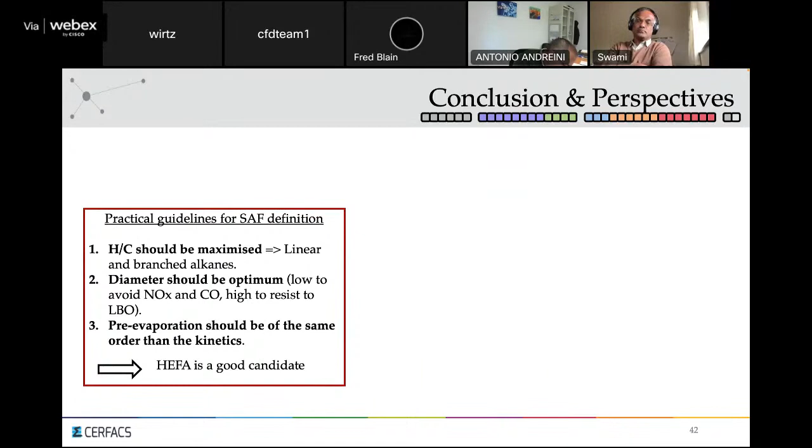This leads us to the conclusion that HEFA would be a good candidate for the use of those three principles for real aviation fuel. This was possible because the framework and tools that we saw today have been set up with this PhD for the analysis of sustainable aviation fuel, and this could lead us to go further on several topics.

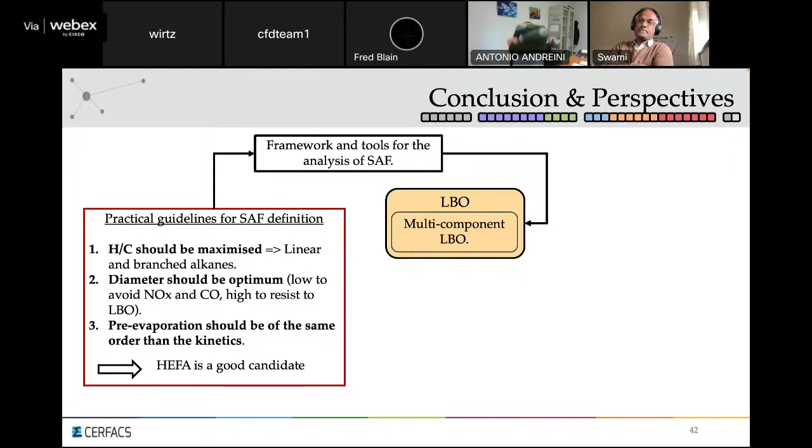The first would be to conclude on the LBO methodology and apply it to multi-component fuels, to be able to see the fuel sensitivity numerically for the lean blowout limit.

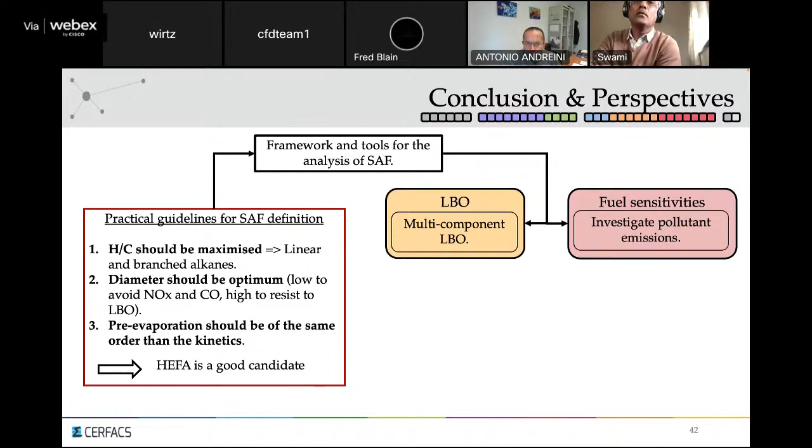Second, to look at the different fuel sensitivities for pollutant emissions, because CO has only been evaluated in this work, but NOx and soot emissions could be evaluated with schemes developed for it.

Finally, with this PhD we tackled problems for heavier alkanes and fuels, but one could think about having blends of those heavy fuels with lighter fuels, for example hydrogen and methane, which would consequently change the flame shape, but whose analysis would be possible with the tools we just set up.

Also, something that would be interesting would be studying the oxygenated species here, to see how they behave in a real combustion chamber and how they burn.